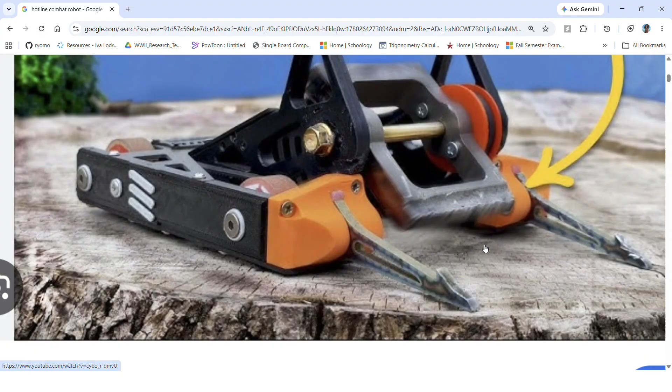And so I can imagine that with this, he probably has either an aluminum or some sort of strong 3D printing filament, maybe PETG. And you can see here, he doesn't use a direct drive to his weapon, right? So he probably has some sort of brushless motor down here attached to this belt on this pulley that's spinning this. It says up to 36,000 RPM, which is pretty fast.

This is kind of going to be my inspiration. I'm going to try not to look exactly at how he's doing this, although I can kind of see right here. Actually, I might as well learn from him, see how he's doing things, and maybe understand, because he seems pretty successful with what he's doing.

Okay, so here he's using two drive motors, sort of a belt drive system with these two pulleys, or these two belts right here. This is attached to the opposite through an axle right there. Cool. Okay, yeah, I think we could definitely do something like that. And this does look like some sort of 3D printed material.

I kind of want to go with sheet metal or sheet aluminum, and I'll probably just outsource that to SendCutSend, although I do kind of like the carbon fiber plates down here. I think it's really just going to come down to how much weight we want to use.

I've seen a lot of people using TPU as a material, and so I do kind of want to use that as a sort of outer shield to absorb some of those bigger hits. Here you can see this vertical spinner is using TPU where you would expect the weapons to make contact, and I think that's a really good idea. So depending on the weight limit, I do want to eventually incorporate a TPU outer shell. But for the most part, this is going to establish our design.

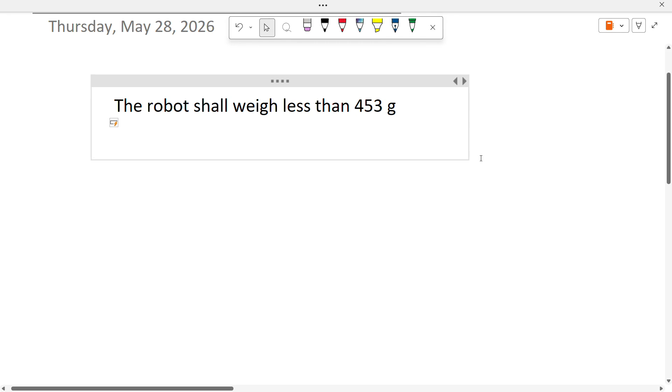And so I do want to write a couple of requirements just based off of this, really simple stuff. I don't think I'm going to go do any research and figure out actual numbers, but just to give myself a little bit of guidance to have somewhat of a proper engineering process. So the robot shall weigh less than 453 grams. I know that's technically a mass, but we're not going to get specific. So the robot shall have a vertical spinner.

The robot, maybe a little bit for the power budget, shall have a battery life capable of, let's say, 2 full matches. And if we find out that whatever LiPo or battery we're using can only supply 1, then we may be able to change that requirement. But we'll get to that when we get to it. If anything, we can just make it really easy to access so we can change the batteries.

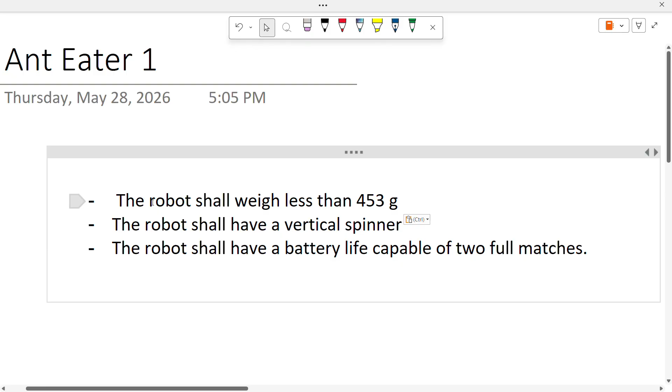So yeah, and we'll say the robot shall have an outer protective layer of TPU with a minimum thickness of... It's hard to tell with the weight limit because I feel like TPU is probably a bit of a denser material, so I don't want to give too much to it as far as weight. But we'll say a minimum thickness of 5 millimeters for now, and these are subject to change. So obviously not doing a ton of proper requirement writing right now, but I do just want to have this to get in the habit of establishing requirements.

So let's go start looking for components. The first thing that I want to do is select the motors. I think our drive motors and our weapon driving motor are going to be our 3 most important components, as that's what's going to help us move our opponent, but also inflict damage. So, look up Antweight combat robot drive motors.

So I do want to end up using a hub motor for the weapon. Oh, this is nice. So they sell weapons as well. That actually could be pretty useful. I kind of like this one. I'm assuming that's inches, 3.25 inches in diameter. That could be pretty helpful. If they don't have the exact size we need, I'm sure we can get something cut out of steel or maybe titanium, depending on how much that costs on SendCutSend. But I just want to look through here and see what our options are. Okay, good to know they have a titanium wedge. That might be good later on.

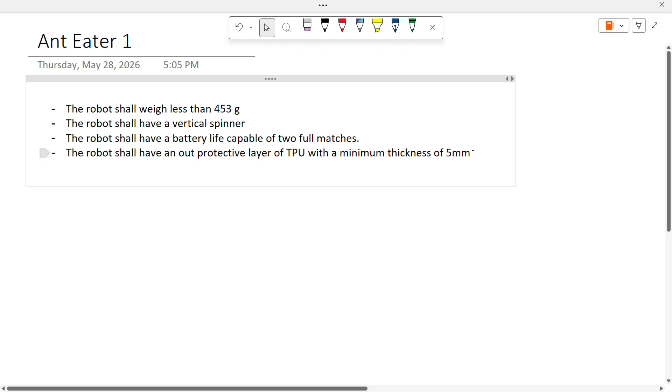Most of my work that I've done in robotics, that is probably the most important information when it comes to motors, or at least when you're trying to integrate motors with your electronics and your mechanical design. Oh, great. So they actually attach a CAD model. So I'm going to go ahead and copy that. Just paste that in there.

Cool. And I think that using OneNote or anything like that is a great way to kind of organize your thoughts. I'm also a big fan of sketching out what you're doing as you're going, so that you're not limited to your knowledge of the CAD software that you're using. I won't be doing that today, and I will be using Fusion, which I feel like I'm pretty good at, so I don't think that I'm limited by that in any sort of way.

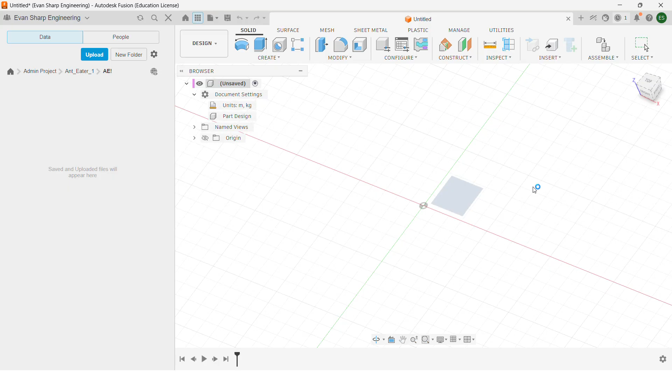But yeah, so we have those motors selected. I'm going to go ahead and download. Now, I'll download that CAD model later. But what I'm going to do is make a top-down drawing of how we're going to arrange all these components within Fusion. So I sort of have all my hotkeys laid out already. And the first thing I'm going to do is create a sketch of this from a top down.

So it's millimeters. Looks like 36.1 by, what is that, 15.5. So we'll go 36.1, oh, I'm sorry. And then our shaft length, we'll go with, is there a price difference here? No. We'll go with the 3 millimeter. This is the same. Yeah, just to save a little bit of weight, we'll go with the 3 millimeter shaft. Or what did I select earlier? No, we'll go with the 4 millimeter, whatever.

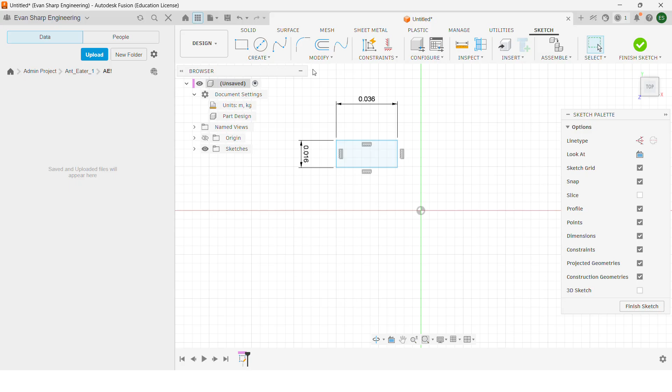So I'm going to then use a midline to get to the center of this rectangle that we already drew. So I've been using Fusion for a really long time, and it's gotten to the point where I don't even know if the way that I'm using it is correct anymore. But I know that pretty much anything that I can think up, I know how to get there. So you can see the way I'm making the shaft is probably not correct, but I just want to make sure that I'm centered correctly on that midline, and this is the way that my brain just wants to do it.

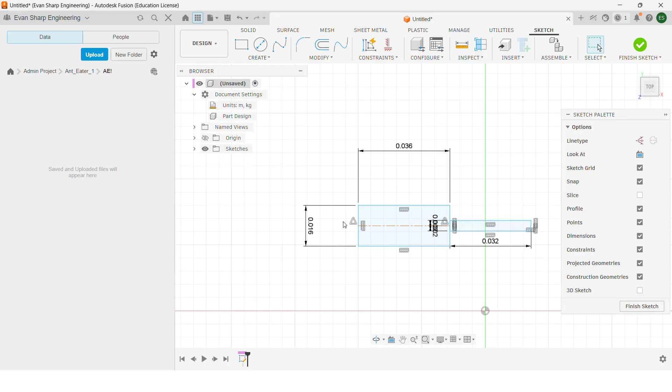So yeah, and then I'll go ahead and trim that line right there. Sure. And let's see, do I want to dimension all of this? Not really. It's probably bad practice, but whatever. Okay. All right, so it's starting to come together. We have our motor here. I do want to draw a midline that we can reflect this across. Let's see, so we're going to have wires coming through there. I want it to be symmetrical about the middle, just for weight distribution.

So just do a construction line parallel with this center line. I think I'm going to go with 2 centimeters in clearance there. 2 centimeters. Oh, but I want to mirror it, so we're going to go 1 centimeter. Draw another center line. And this is what we'll mirror our sketch across. So create, mirror, mirror line, bang.

Sweet. Okay. So now we have our motors laid out here, and I do want to just measure this in a pretty rudimentary way. So we're looking at about 16 centimeters. That's kind of what I figured. I figured we would end up having kind of a square design, maybe 15 by 15 or 16 by 16. It looks like with all of our frame and stuff, it might end up being 17 or 18, but that's fine. For now, I'm not gonna get too caught up with that. Okay.

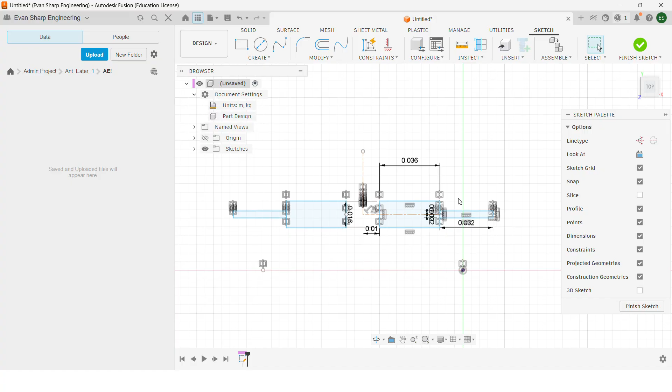So the next thing I want to do is, we really should do our battery now. I say that, I think I'm going to end up just doing like an electrical bay, if you will, over here, and probably create some sort of custom battery arrangement to fit that, rather than buying something pre-bought. That way I can have a little bit more creativity with how I'm doing this. I am being a little bit lazy right now. I probably should establish some sort of power budget, but I'm not.

But, considering a million people have probably made Antweight combat robots before, and they probably use 2 of these motors and 1 hub motor, and they all use the same receivers and controllers, I'm not going to worry about that right now. I'm going to assume somebody's done it already. I will also be able to figure it out down the road.

But for now, we kind of understand our width, and I want to go with a square design, just so it's a little bit more stable and easier to control. So we'll go with the center rectangle, and I'm going to make this a construction line, because I'm not married to this design yet, but let's see. So that's 16 right there. We'll go 17. Give a little bit of leeway, because I'm not 100% sure.

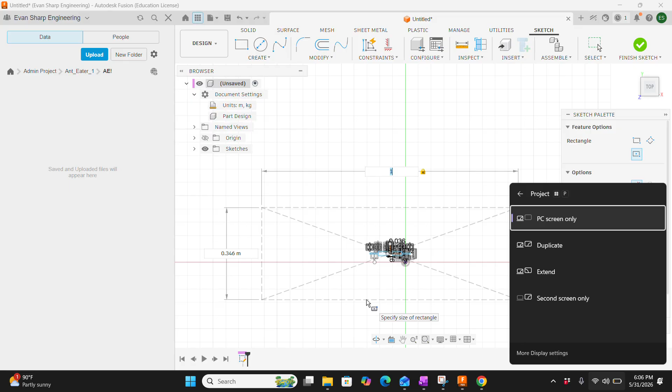Oh, actually, with that, what is that? Sorry, I don't remember what project that was from. But with that 5mm TPU shell, let's go 17.5. Oh, cancel. Control Z. Sorry about that.

First time doing this. This will not be polished, but I do just want to get in the habit of making videos like this, because I really do love projects like this. I think that this is, sorry, I said 17.5mm or centimeters. Sorry, I'm all over the place. Golly. Sorry, trying to think about what I want to say to you guys next and trying to make these sketches at the same time.

I do think that doing projects like this is becoming ever more important, with the advancement of AI and how addicted everybody, especially my generation, I'm 22, is to social media. I think it's so easy to become a consumer of information and media rather than a creator. Even in your own projects, at least I find that the pressure to use AI in order to do what I want to do in a quicker way, so that I can achieve more, consume more information that AI is giving me, is very high, and it's really hard not to, honestly, especially as an undergraduate and as a student athlete.

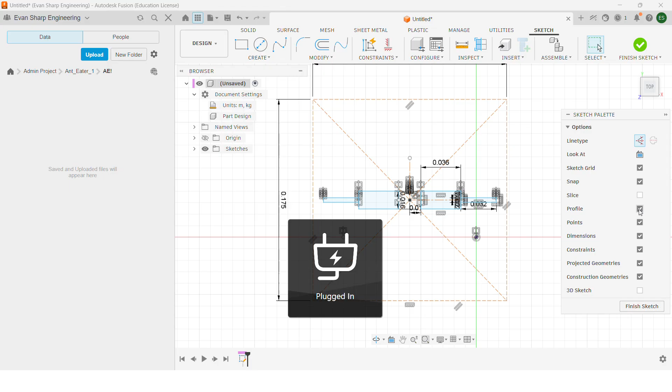But I also think that it's so powerful that if you give it the ability, it will rot away your ability to create things, right? It'll rot away your ability to make critical decisions. Just the same way that social media will rot away your attention span, I think AI will rot away your creativity and your self-reliability, right? So that's kind of my spiel on that.

Okay, so back to it. We have our motors now, and I'm going to go ahead and start sketching out the frame. I mentioned earlier I wanted to use sheet aluminum. This is going to be really light. Not 100% sure what gauge I want to use yet, though. I know I am going to outsource this to SendCutSend because I don't have a way to cut aluminum. So I'm just going to look up SendCutSend aluminum. We'll go 6061 for now.

So I'm going to gauge thicknesses. I have no idea how thick I want to go. No idea at all. But I do know that I want it to be definitely not close to 2 centimeters, probably a little bit less than 3/4 centimeters. I'm not 100% sure how to justify that though. Let's see. You're gonna see my engineering inexperience because I am a recent grad, so I have a lot to learn.

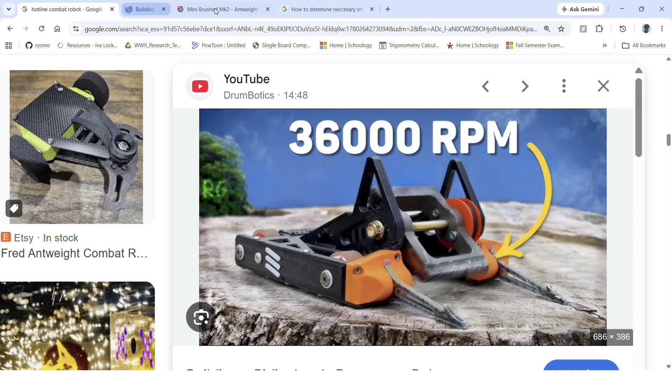And so I really do think that if I have 1/2 centimeter, maybe 3/4 centimeter aluminum, acting as this frame right here, it's going to be more than strong enough to take that impact, especially in the Antweight class, which is why I'm not too worried about what I pick here. So let's go ahead and look.

Yeah, I know I just had that whole spiel about AI, and then I'm using the Google AI summary.

So let's go to sheet metal gauge size chart. Okay, so aluminum, inches, millimeters. We'll go in millimeters. For some reason, my brain just works better in the metric system, even though I am American. I do want to go 6061. Closest to 7 millimeters at 6061. 2 millimeters. Okay, maybe 7 is overkill. 7 millimeters is definitely overkill. I don't know what I'm thinking.

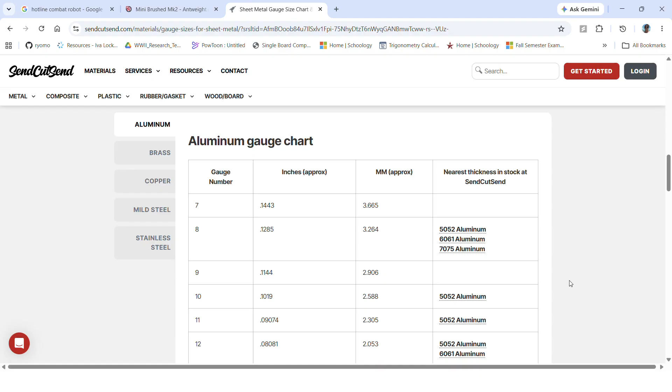We'll go with this. This looks like it's 1/8 inch. Sure. So that's what we're going to go with. And also they have different alloys there. That one has the most options. So if we want to go back and change, because this might have a slightly lower density and might give us some sort of attribute that we want later on, we still have that ability. But for now I'm just going to go ahead and put that in the OneNote.

All right, we're getting somewhere now. So now I understand the thickness of that, and so we're going to use that for our rails here. So let's see, what was that? 1/8 inch. I'll be able to remember that. So I'm going to go ahead. You're about to see the sort of roundabout way that I like to make sketches. So even though this is 1/8, I'm going to go 1/4 because I'm using a center point rectangle, right? But it's right on the face of that motor, right?

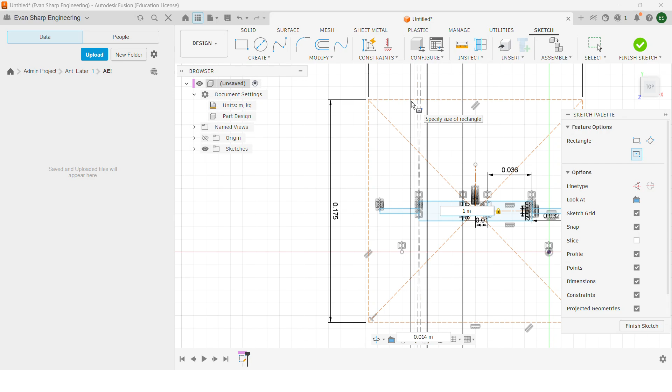So I don't know if I want to go all the way. Well, we want our wheels to be in a square form, so yeah, I will go all the way there. Let's see, 1/4 inch. Oh, this is length. I'm being an idiot. All right, so it's going to automatically constrain to that 17.5 centimeters that we set out earlier. So I'll go to the other dimension, and I'll do 0.24 inches. Right, okay.

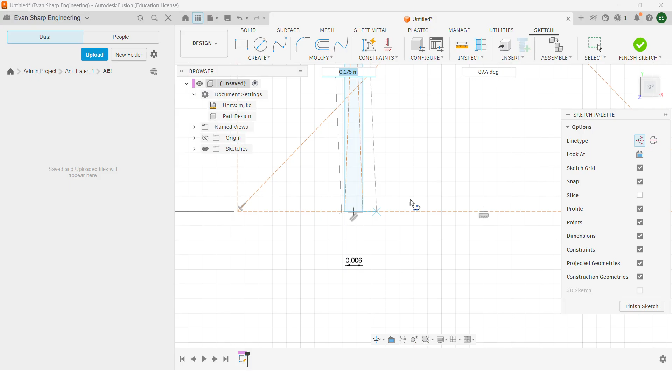And then what I'm going to do is I'm going to draw a center line here. Sorry, I'm on the wrong type. Wait, what is this? Construction. I need a center line. Right, and then I'll do a real line, kind of overlapping that. And then what I can do is use my trim tool, sort of trim that fat. Oh, I picked the wrong one. I didn't want to. T. Okay, fine. Yes, thank you.

Am I using sketch the proper way, or the way that they intended? Definitely not. But that is okay. Okay, so now we have sort of that sheet metal cutout that we're going to do from our top-down view, right? And so the first thing I want to do is, if we go back and look at Hotline, you see these frames, right? It looks like he 3D printed those. We're using aluminum, but that's what I'm creating right now.

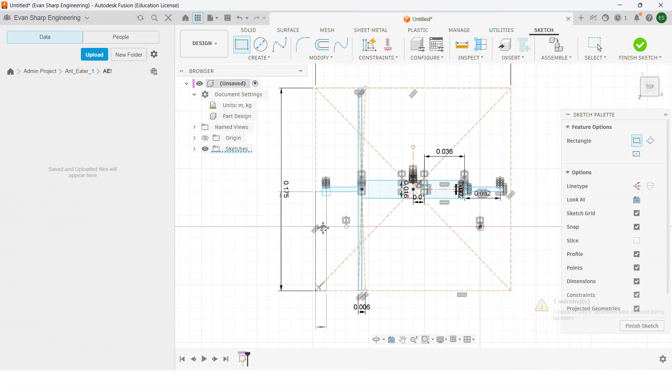Tab, I'll go point, what was it? Oh, right, 1/8 inch. Perfect. All right. Guys, this is coming together. And I saw these as we were looking through earlier. Oh, no. I just closed out my OneNote. But

as I was looking through the Repeat Robotics library or catalog earlier, I saw these. Gold clamp hub for custom wheels. Okay, that's not what I thought it was going to be. Gold screw hub for custom wheels. No. What I'm looking for is some sort of hub in order to attach these aluminum frames together. And so here we go. Something like this. Yeah, this is actually perfect.

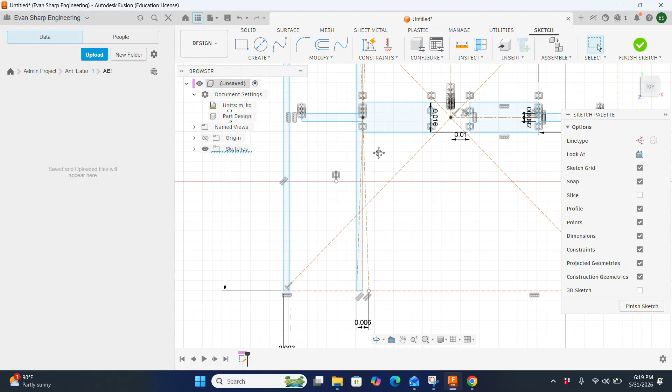25 millimeters. Yeah, this is perfect. So this is exactly what I want to use in order to attach my aluminum frames together. So I'm going to go ahead and CAD that up. And so that'll go in these corners, right? Now I'll do that later. We're rolling right now, but I am going to use that thickness.

Okay, so we have that 2.5 centimeters, right? I'm going to go ahead and finish this sketch. And right now I'm just going to extrude where that frame is, right? We understand that that motor is going to be in the center point. So yeah, we did all those sketches just to have this. But we're going to go 2.5 centimeters. Oh, that's 2.4. Okay. Here we go. We're working now.

And what I'm going to do is I'm going to go download the CAD model for this. Do they have a CAD model? Yes. Awesome. Wonderful. Download file.

Okay, while I was browsing through Repeat Robotics, I also found these aluminum hub motors, and so I am going to go ahead and get one of these, because it looks like you can go direct attachment to the motor, which is something that I want. I don't want to add any unnecessary parts, and I do think we'll get much stronger hits and much stronger collisions if we go direct.

Let's see, do we want red, black, raw? Oh yeah, I definitely need the hardware kit too. Okay, this is definitely coming out to be expensive. We'll go with the black beater. Maybe red. I'll decide that later. But I am going to go ahead and download the CAD model. Is there no CAD model? I would really like a CAD model. Is there a technical drawing?

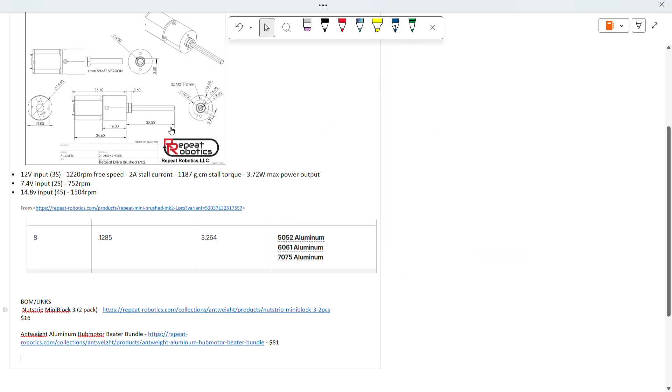Oh, this is for one, so I'm going to have to buy 2 of these for 20 bucks each. They're definitely scamming. They're not scamming. I take that back. They're probably a really good company, and I've heard some good things about them, but they do have a little bit of higher prices. But I think I'm getting a good deal. And I think these are pretty high quality components, so I'm happy to pay for that.

$40. Yeah, so this is climbing quickly. But we'll figure out how to reduce prices later. For now, I just want to go.

Okay, so now I'm just uploading all of the CAD files that I downloaded. So we have our brushed motor, 4mm shaft, our hub beater assembly, and then okay. So now we have those sort of side frames that we made. Pretty bare bones at the moment, but we'll get to that. And I went ahead and got these CAD models so we can start sort of putting together an assembly.

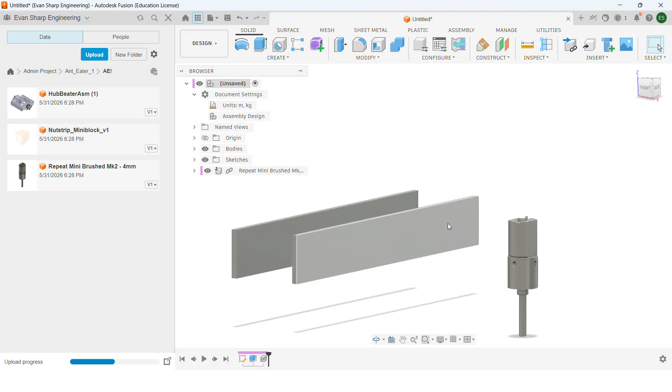We'll convert this. So I don't like the Fusion update that they did a couple months ago, where you have to set a file as being a part, an assembly file or a hybrid file. I'm sure there's valid reasoning for that, but the way that I learned to use Fusion, and as I mentioned earlier when I was doing the sketches, I don't know if I do it correctly, but I've always just made parts and then I turn them to components when they're ready to be components. But that way I'm able to reference components to one another as I'm building my assembly file.

It's never made a lot of sense to me to create a component in one file and then drag it into another file and just keep referring back to the dimensions, or I don't even know how you would do that and make the parts align, right? So it makes a lot more sense to me to just always use the hybrid files. Okay, so here we have our motor.

Right now its material is just steel, just so I can differentiate it from these aluminum components. I'm going to go ahead and assign it a material. So modify material. Forgot that I had the shortcut U there. Okay, it probably doesn't matter. Let's see what looks cool. Metal. Actually, I should definitely just do appearance, not material, so I can still reference properties, because I know the weight of that. So we'll go metal, coatings. Oh, this black oxide. I like to do this just so that I can see what different components I have going on.

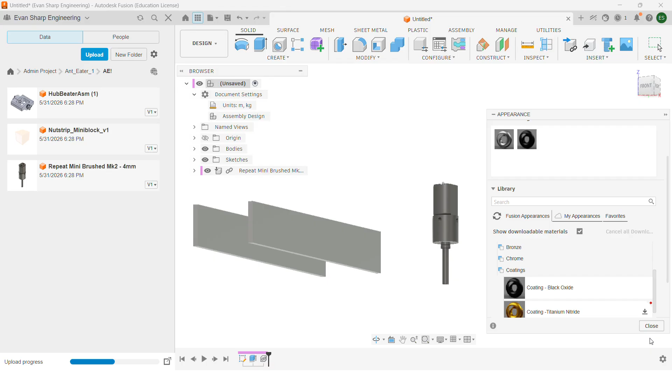There's definitely some more tenured engineers watching this and shaking their head, knowing that I'm just doing a million things wrong. But I'm an entry-level engineer, and so I'm learning.

So yeah, I'm going to go ahead and joint that right there to this aluminum, and we'll go ahead and assign the aluminum there. And I'm seeing that this is 2 separate bodies in one component. I'm fine with that for now, just because part of me wants to just have the same component copied over, but I know that this one's probably going to have different fastening holes than that one, so I'm going to leave them separate for now. So I'm going to turn visibility off on that one and get to work on this one.

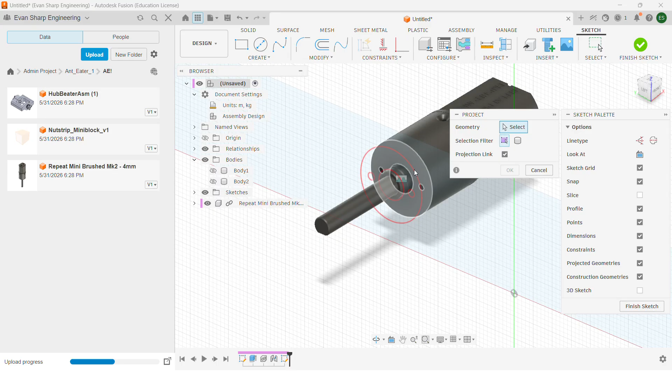So my favorite tool in all of Fusion is this project tool. So I just press P, and I can project this face, and God, that's so easy. And now I have that sketch. I can just go offset, give a little bit of a clearance here. We'll go 0.5 millimeters, perfect. And we'll do 0.25 millimeters. Now, what's really going to constrain us is SendCutSend's sort of manufacturing tolerances. But I gotta imagine they can get it down to 1/4 millimeter for sheet metal.

What's going on here? If my employers are watching this, I would definitely take more due diligence for you guys. But since this is just kind of a hobby thing, being a little bit rough around the edges, I'm sure it'll be okay. And then we'll just extrude this all the way out. Just make sure it's only cutting that one body. Okay. Perfect. Look at that. All right.

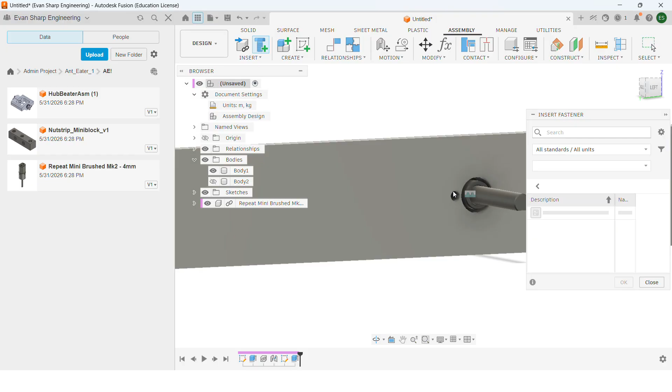And I'll go ahead and do insert fasteners here. Oh, there it was. Insert fasteners here, just so that when I go ahead and make these wheels, I can see how much room I'm going to be working with. I don't think I want to do countersunk. Probably want to do something small, like flanged. Probably doesn't even matter what I select right now, because I'm going to end up doing something different later when I actually look into buying these components. But we'll go flanged. No, I don't like flanged. Definitely use round head. Most likely use a hex socket.

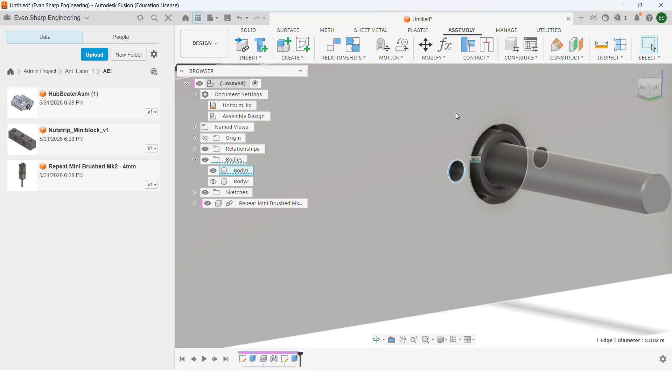Okay. And just put that bad boy. No. That's way too big. Wait, no, what am I talking about? Yeah, it is way too big. Auto M3, can I not go smaller than that? What's the diameter of that hole? Close. Hold on. 2 millimeters, and it's pretty small. I may have to attach these motors. Let's see, are these tapped? I can't tell. It doesn't say. Okay. Alright. Yeah, that'll do for now.

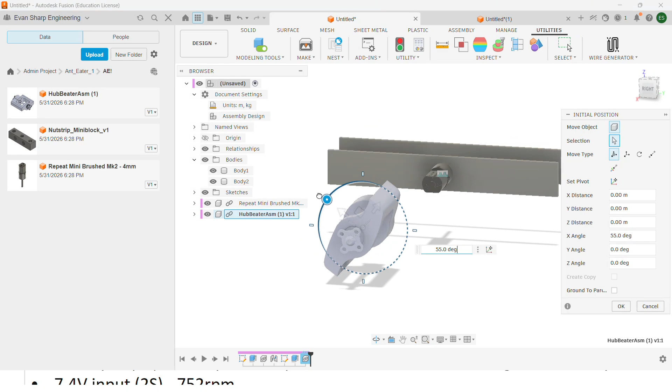So now I'm just placing this weapon, and I want to orient it vertically because I feel like that's going to be the more constrained space. Obviously, I don't want it dragging on the ground. Doesn't really matter where I insert it right now. I'm eventually going to joint it to part of this, but just to visualize this right now, because I want these bolts right here.

Now I want this plate to fasten to this, right? So this isn't going to end up being rectangular. I'm going to end up having sort of like a curve up here, if you can visualize that, that's going to hold this, right? But just for visualizing right now. Okay. I do want this. What am I looking at here? Okay, that's wires.

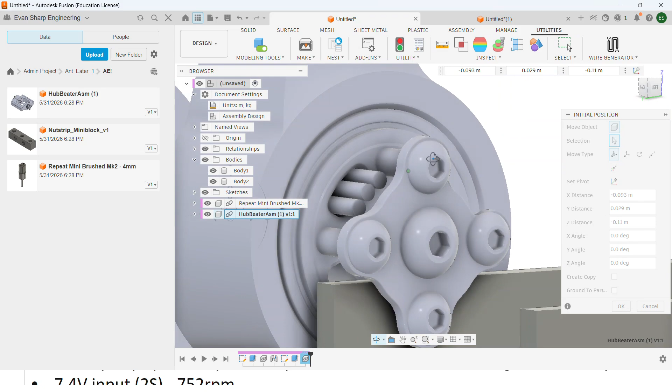Okay. I just wanted to see that. So go ahead, do that. Let's see, this has a diameter, outer diameter of 3.6 centimeters. So what I'm going to go ahead and do, the question is how much overhang do I want to have, right? So if we were to do

So what I'm going to do is I want to constrain this vertically or horizontally with the front of this frame. Right, and then, definitely didn't do that right. I'm going to go dimension, yeah, there you go, 0. Why can I not do 0? Okay, that's going to be fine for now.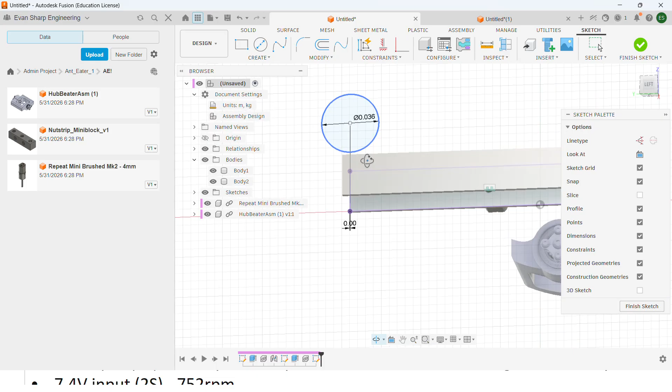And vertically, I'm going to inspect from there, kind of the outer diameter is 6.4 centimeters. Okay. So that means since we don't want this on the ground, but we want to get it as low as possible so that I can get under other opponents, we want that. So half of 6.4 centimeters is going to be 3.2 centimeters. Just to be safe, I want to give it about a half centimeter clearance from the ground. So 3.2 centimeters, 27. Okay.

Now you got to figure our wheel diameter is going to overhang probably by at least 3 millimeters. So right now we're looking at 32 millimeters because that's half of this diameter, minus, you want to have a 5 millimeter clearance from the ground, so 32 minus 5 is 27 millimeters, but your aluminum frame is going to be elevated by 2 millimeters from your wheels, so you add another 2, so that's 29 millimeters. Please correct me if I did that wrong.

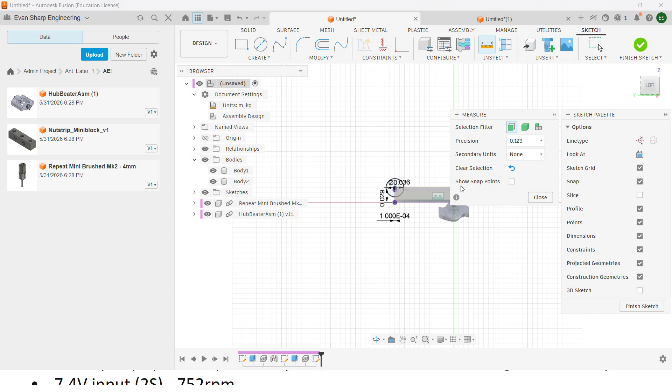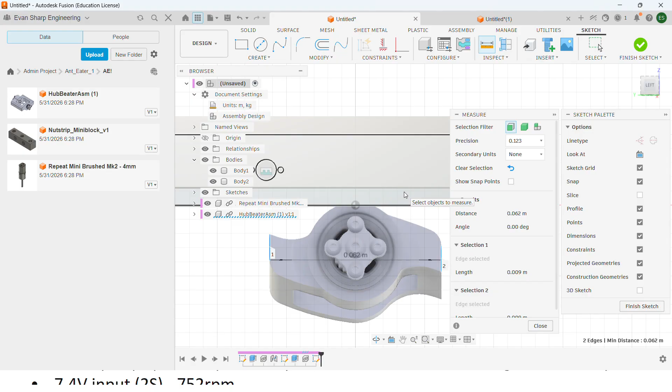That doesn't look right at all. This looks way bigger than that. Did I measure that right? Okay. Right, okay. Outer of 6.2, of 0.062. Divide that by 2 to get your radius. You get 31 millimeters. So 31 millimeters up, it's going to be grazing the floor, theoretically. Add 5 millimeters clearance, so 36 millimeters. Minus 2, 34. Okay. I don't know how I got 29. Sorry, guys. Okay.

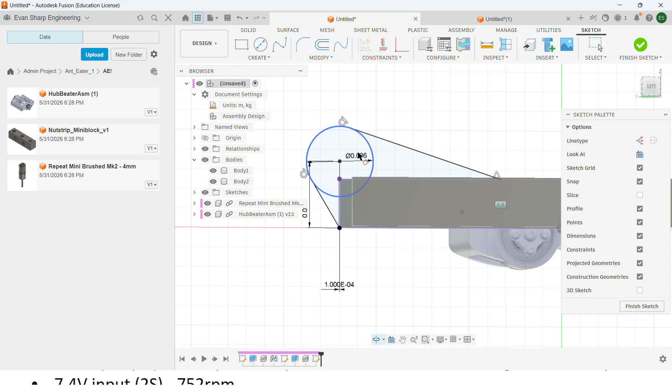So what I'm going to do is I'm going to make some tangent lines. We'll go constraints, tangent, nice. And then just to give this a little bit more shape. Oh, okay. I was doing it from the center point. We'll go to the midpoint there and set it up to be tangent. It's looking pretty good. That'll be on this face right here. As we did a circle. It's awesome.

I just want to see something real quick. I'm trying to understand if it needs to be flat to this face or how this fastening system works. Let's go back to this hub motor kit so I can get a better look. Do they have like an assembled video?

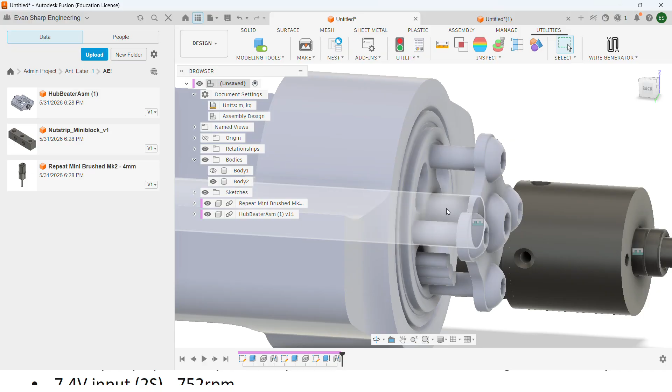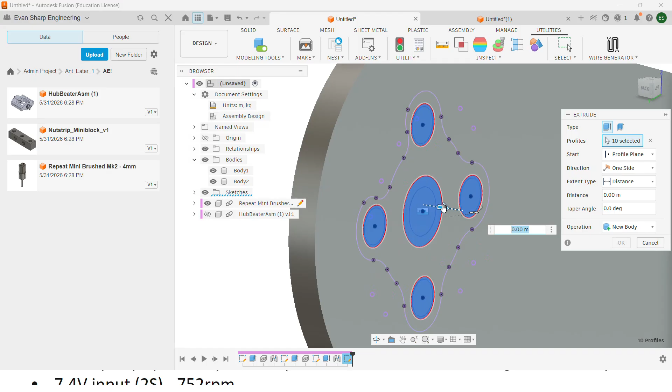So we're going to create another sketch on here. We'll go project. You know, I love the project tool. And I'm just going to hide this real quick. It's an interesting shape. But I'll go ahead and give that millimeter clearance. And give the rest of these 1/4 millimeter. Should be accurate. Turn that back on. Sweet.

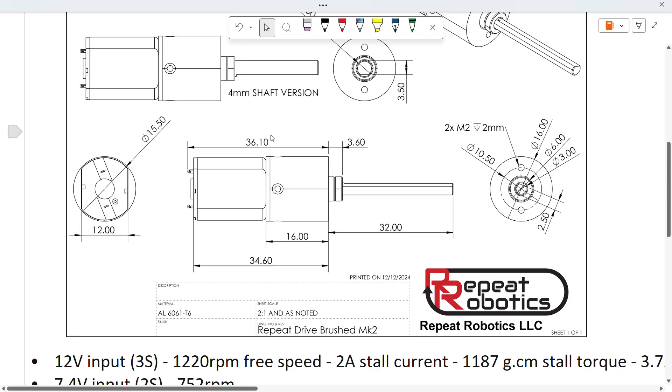Okay, the next thing I'm going to do is bring in these nut strips, and they were like an anodized blue aluminum, I believe. Let me go back. I don't know what material they were. Yeah, 6061 black. Okay, we'll do that. So I'm going to edit the actual part so it's not just in the assembly file. Modify material. Oh, I'll make it blue for now. Oh, wait, oops. Guess I gotta do the appearance as well. We'll make it black. That's what it is in real life. Okay. Back to our assembly file. Update this. Sweet.

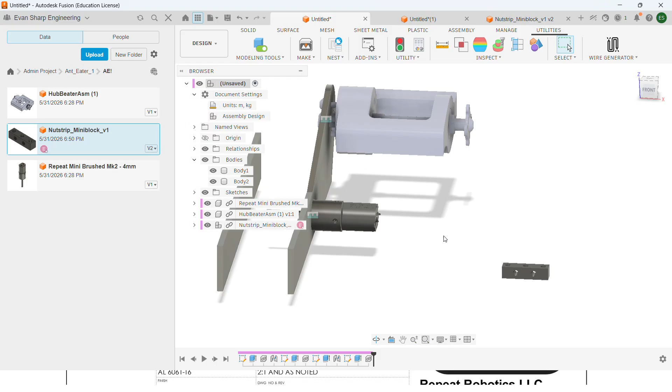I want to have 3 of the holes attaching it here. Flip that. That's 2. So, what do you think about this? Yeah, so I want to hit this corner right here.

If you're still watching this, you're different, that's for sure. Brother, I don't know what I'm doing wrong here.

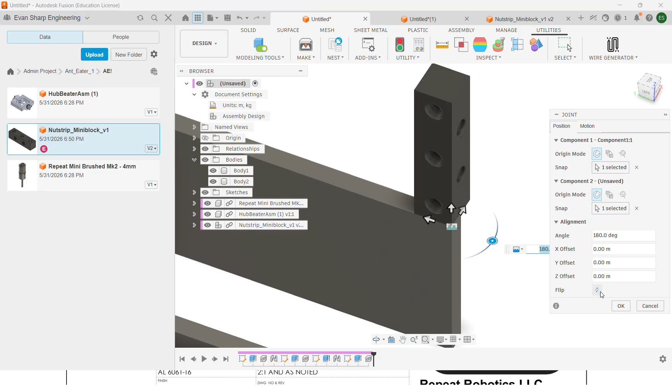There we go. Okay. Now I'm just going to duplicate that a million times. Just kidding.

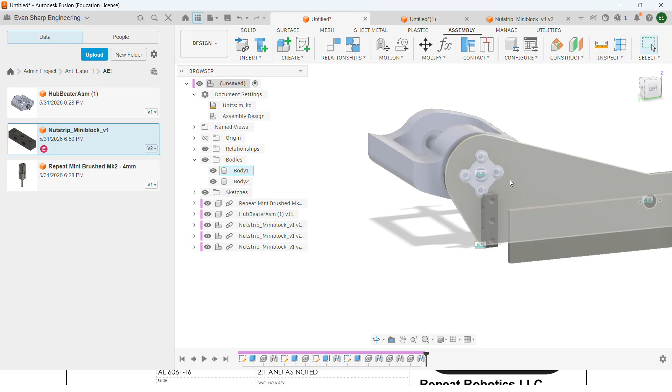Okay, so we're running into our first kind of issue here using these nut strips, right? So it's going to run right into, so you can see, sort of this plate that our weapon is attached to. So I'm wondering if I want to move this up, add a little bit more clearance from the ground, right? Because we're going to end up having ramps at the front of it that will guide any opponent towards our weapon.

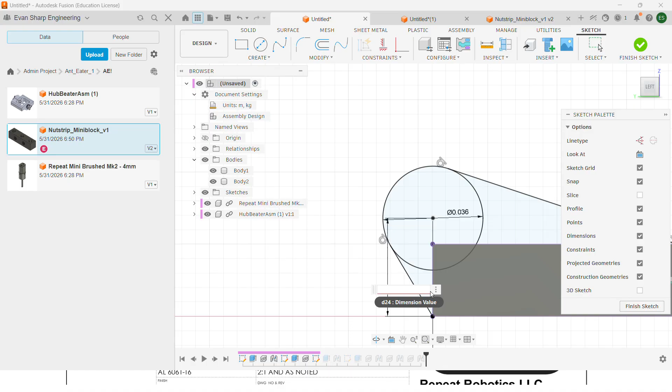So I'm going to go ahead and do that, and I really wonder if I can just edit this sketch and change that vertical constraint, or no, sorry, that's not what I meant. Which sketch was it? Was it this one? Yeah, I think it was. And is this constraint right here? So if we give it another centimeter, that would be 44. So let's see how that affects everything. And it did not like that. But it does look like that would fit.

We're going to go with a little bit of a jank fix, but it should work fine. Yeah, so that's tangent. Bang, bang, bang, entering flow state. P, okay. We'll turn off visibility to that. No, not that. This. Oh. 1mm. And all this is going to be fastened anyway, so as long as there's enough room for the bolts to fit. And I'm going to go ahead and copy that.

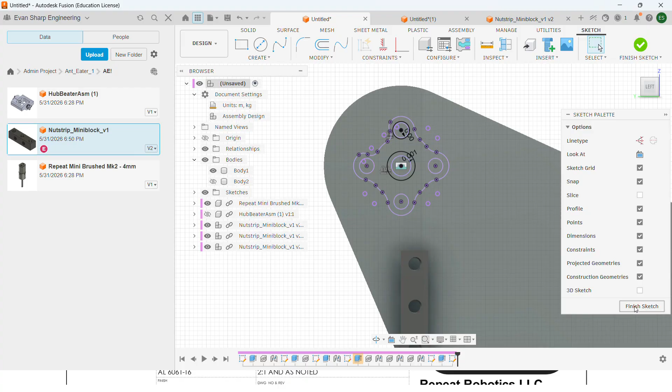Actually, I know an even faster way to do this. I'm going for speed. Go through, and then I want to use the hole tool. Turn that sketch back on for me. Hole. 1, 2, 3, 4. And so we want that, oh gosh, what was this diameter? Jeez, okay, maybe I'm not saving time that way, but 3mm, so we want it to be 3¼. Fast as hell. Not really.

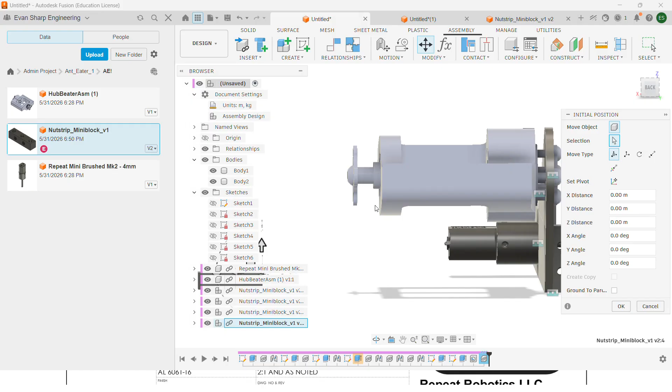Oh boy, it's coming together. Put this last block on. Yep, thank you. Flip. Yeah, this is going a lot longer than I thought it would, to be honest. I thought I would be here in about 30 minutes, but that's just how life goes. Especially engineering stuff without proper preparation.

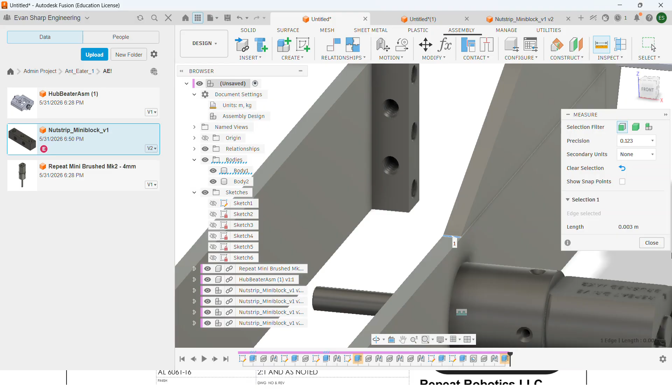And now we're having some sort of extrude issue there. I don't know what's going on. 3mm, and this is supposed to be what? This happens sometimes. Let's change that. Okay. Nope. I mean, sometimes I'm sure I'm doing something wrong, and I've noticed specific issues come up with the way that I do things in Fusion, and I have to find dumb little fixes like that.

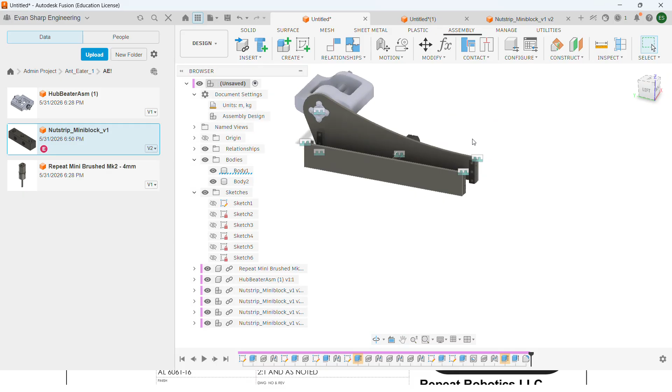So what do I want this radius to be? 4 centimeters maybe? No. Let's drag and see. Yeah, I kind of like that. So 4 centimeters. Yeah, that looks real nice. And for the rest of these corners, well, maybe not, because those are going to be concealed by this back plate that we end up adding. So I think we're good for now.

Okay, so one issue that I am noticing, this is a dumb issue to have. I'm going to have to move that motor. Right, because if we have that other plate mounted here, those motors are definitely going to interfere with each other. So I'm going to move this motor towards the front a little bit so that on the next piece that we create, we can have them stacked next to one another. Shouldn't be a terribly difficult change, but we will see.

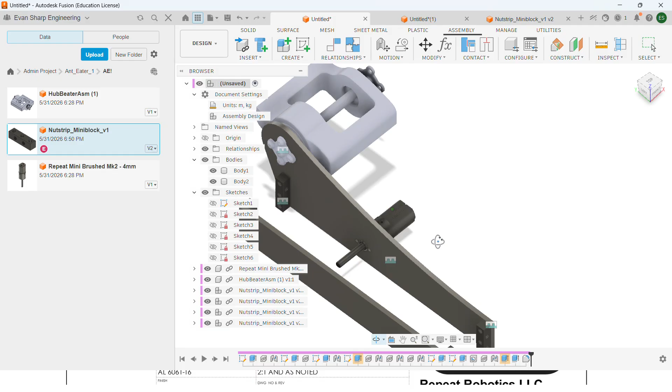So I'm going to scroll my timeline all the way back. I don't remember what is what. Oh, definitely this one. So we're going to edit joint and move it that way. Yeah, 2 centimeters. Bang. Yeah, it's easy, right? And so now, from our midline, when we mirror this over, we'll have to move this 2 millimeters in the opposite direction to balance things out. Maybe not. I don't know how much the balance of those motors is really going to affect things. As long as they're driving the same, it shouldn't be a big deal.

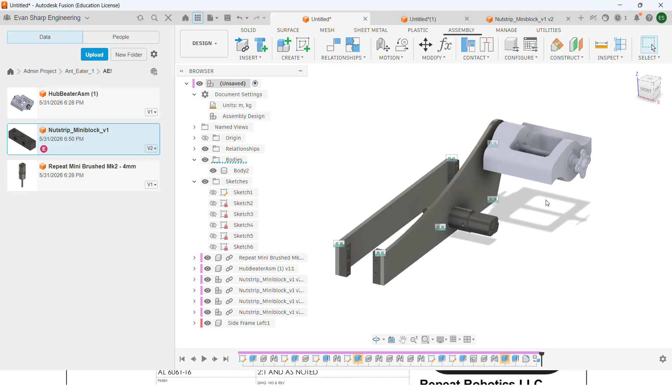Okay, I'm going to go ahead and make this a component. Create components from bodies. We'll call this side frame left. From the perspective of the robot, that is the left side. And we're going to move that over. Nope, hold on. But I want to create a copy. No, that's not how I want to do that actually. I have a better way to do this, so it'll be its own component. Okay. So I'm going to project this whole thing.

Okay. Bang. And then because we moved that, it's 8 millimeters. I want to move this over 4, so it'll go right over. No, it's not going to work, is it? But we know that that's 8 millimeters, so we're just going to create a construction line.

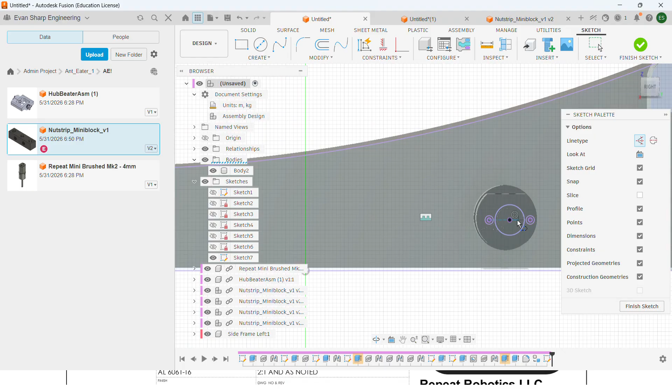Yeah, here. 4 centimeters. Okay, I'll go create a circle. Not a construction line. 8 millimeters. And then I want to know the length from here to here, 5 millimeters. And this is 2. Okay.

L, construction line. Yeah, this is not the right way to do this, to be 100% honest. Because if I were to go and change something about that original one, it would not update this. But, oh well. Yeah, see, I'm already doing something wrong. 8 millimeters. What am I doing wrong here? 5 millimeters. At some weird angle.

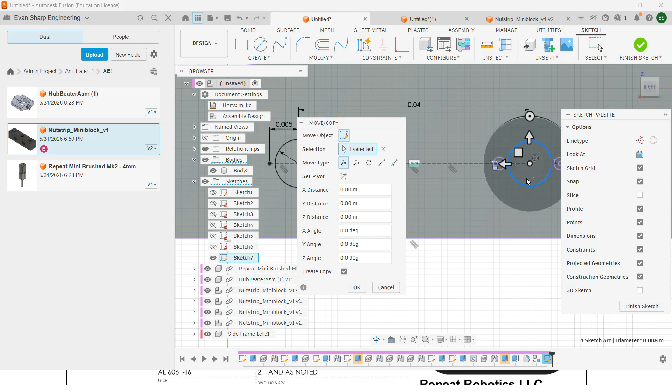Okay, that's how we're gonna do this. So let me. Okay, sorry. I'm rusty, guys. I'm rusty. Almost like that. Create a copy. We're gonna move it 4 centimeters. Nice. All right, and if I remember correctly, we wanted to make that 3.264 millimeters towards the motor.

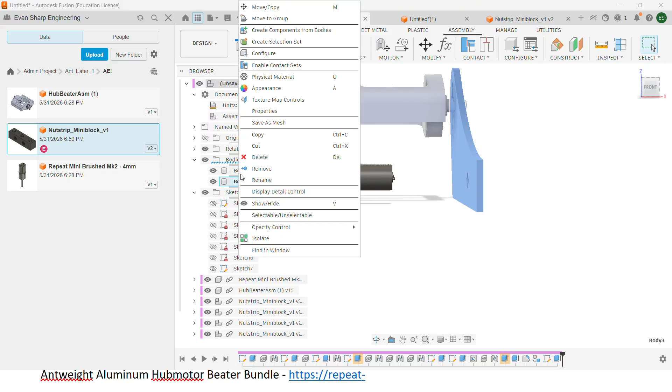Bang, there we go. And then currently that's a body, make it a part. Create components. We'll call this side frame right. Curious as to where we are on our weight budget right now. I'm a little worried. I mean, obviously right now we're not going to be over, but I don't know how we are on track. Looks good to me.

Now, if we compare to this original sketch where we outlined. Okay. So I do think that we can make it a little bit shorter from the back to make it a little more square. Well, it's going to depend on the length of those belts. We'll keep going for now.

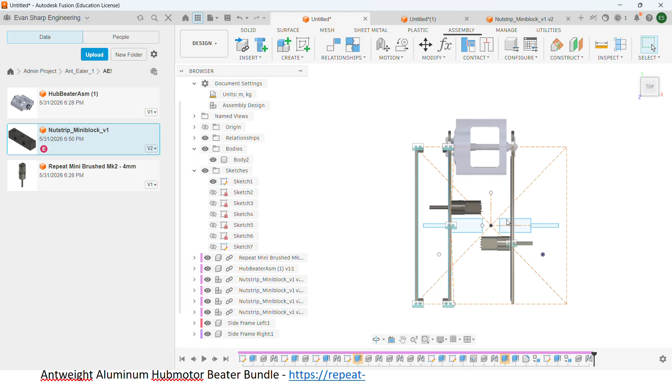Probably should have left that on the entire time. And we could make this a lot skinnier, but because we have this hub motor selected, we'll leave it for now because it's going to be the right width for that. So here we go. We'll create a mid-plane between these two. Okay, make this. Then we're going to mirror this and all this.

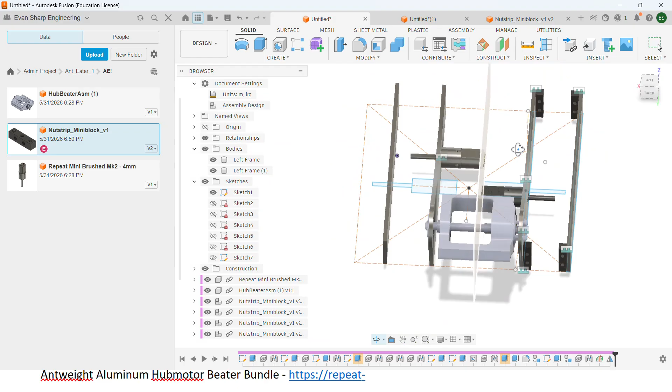And I think that back here we'll have our sort of electronics box, and that will definitely be enough space for what we're doing, and then everything else will be used for our drive system, right? So this is really coming together. I'm going to go ahead and make this front area, right? So let's make the back first.

So what I'm starting to realize is this is becoming more of a CAD kind of walkthrough and not so much an engineering walkthrough, which I'm becoming a little bit regretful about, because I do want the rationale to be there, and I'm mostly just kind of flying by on this and not giving my reasoning for what I'm doing. But you know, this is take number one.

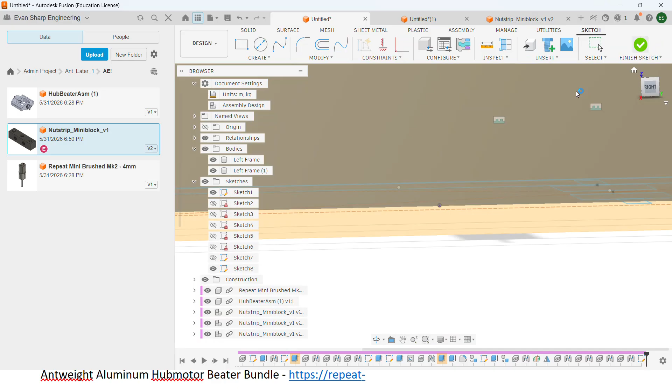So I think what I'm going to end up doing for these front plates is I'm going to have an aluminum plate cut out there, and then a TPU cut out almost like in the shape of a wedge, and we'll have those hooks coming out of the wedge. But for now, let's do this back plate. So create a drawing here, and we're going to project all of these.

We'll give a, why is that not aligned? Oh, probably is aligned, but oh boy. Okay, we're gonna have to make these. So it looks like that. Okay. Let me go reference that drawing and see what that dimension is supposed to be.

So that is supposed to be 6mm diameter. So I want to give it 6.5. But it's kind of hard to center. Right, because 6.5, that don't look right. That do not look right. I don't believe them.

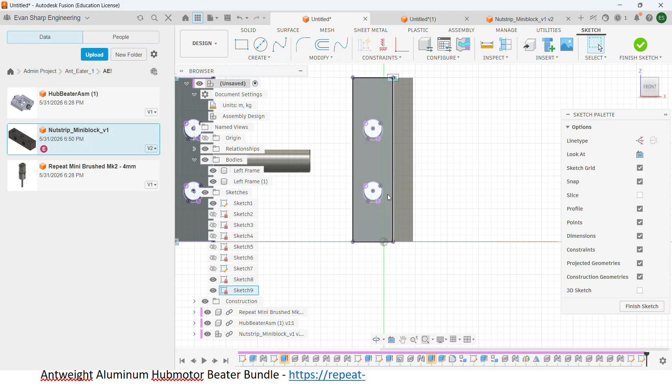Alright, so what I'm going to do is, because I have a drill press, I'm allowed to just make this as is, and if I end up needing to flesh out some of the holes a little bit more, I will do that. Wonderful, wonderful solution, I know. Would this fly in industry? No, 100% no. That's okay. This thing's going to end up getting destroyed anyways. Well, hopefully not too destroyed, but it's going to definitely take some damage.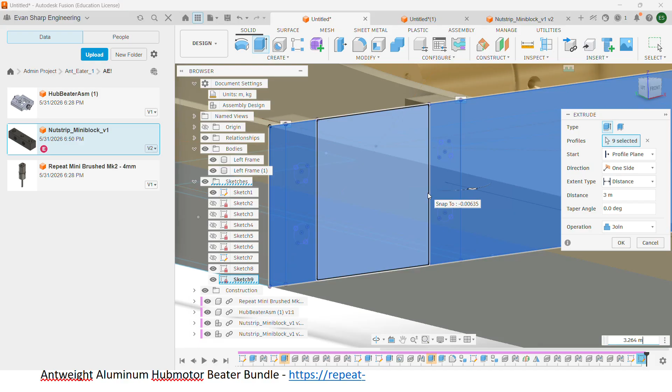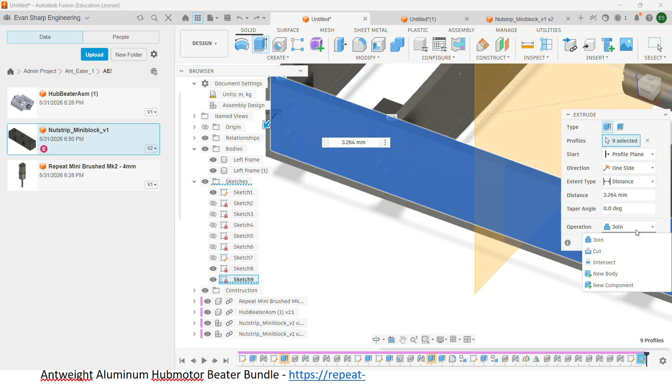Remind me the thickness one more time. 3.264 millimeters. Oops, messed that up. Oh no, attached. I don't want to do that. So the reason it's attached is because I used this join, and I should change it to a new component.

Yeah. So now I'm going to extrude those holes through, and I want to turn visibility off for that, and project that, and that. Okay. So now when I come back, we're just gonna have to do this the old-fashioned way. We're gonna go 6 millimeters. It says 6, but I don't. We'll go 5. 4.5.

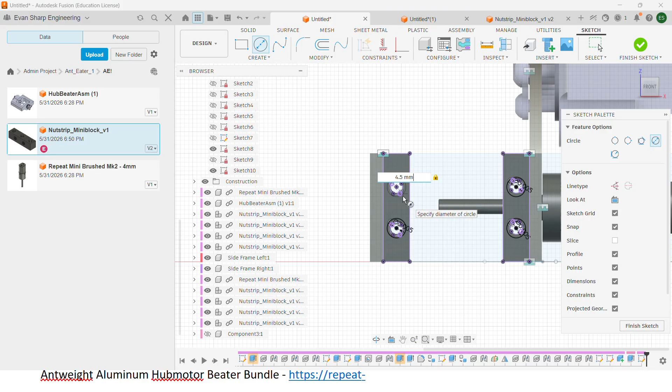Okay, so now we can just select all these holes, extrude them through, and end up adding our backplate. Make sure we're only cutting that one object. Wonderful. There we go. There's our backplate. This is coming together.

Yeah. Okay, I want to go ahead and see where we're at with mass. So I'm going to assign all of these the right materials. So we got to figure out what material I want that to be. If we go back to our options, we have 5052, 6061, 7075. I definitely want to go 7075. And the reason is that's most durable and I believe most abrasion resistant of the options. So just confirm that.

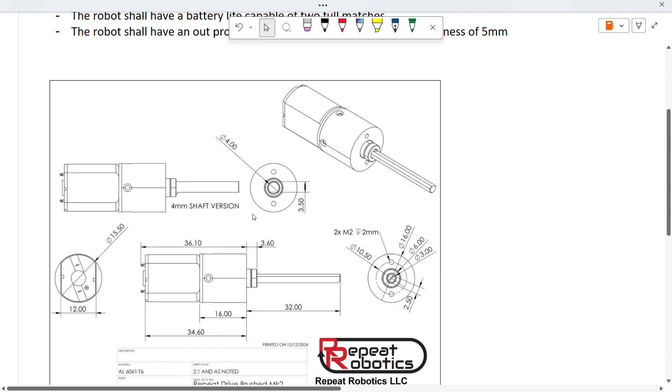Oh, okay. Possesses poor native abrasion resistance, especially in T6 tempers. Has high strength, highly susceptible to wear and scratching. Okay, that's fine, because if you recall, we want to have this TPU layer, right? So ideally, this thing's not going to be getting scratched much, and if it is, it doesn't really matter. But because it's renowned for its high strength compared to 6061 and what was our other option? 5052. That's what we're going to go with. So 7075.

7075. I should definitely know that off the top of my head, but it's been a while since I've selected materials for anything. The last thing I did was my senior design project, and we made most of those decisions just based off of what was available, to be 100% honest, even though we wouldn't tell our professor that, but yeah, it's true. So having the actual options now it's pretty cool.

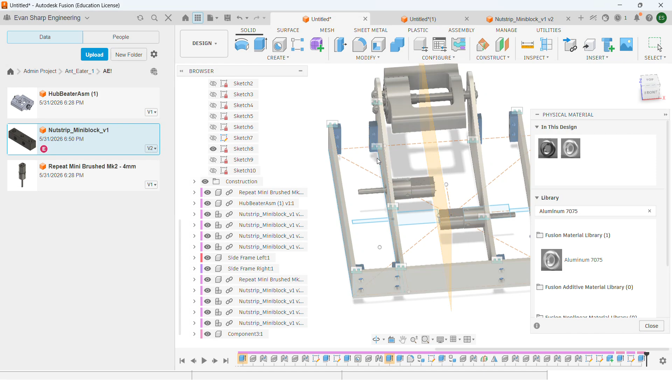I already know the most CAD intensive portion of this entire thing is definitely going to be the drive system, because we're going to have to figure out the length of those belts. That'll determine the positioning of these wheels, because I want to get it as wide as possible to stay within that square that we gave it. But obviously, I don't want to have to make my own belts. Although I could print them from TPU. But I understand that if I buy one, it's probably going to be much stronger.

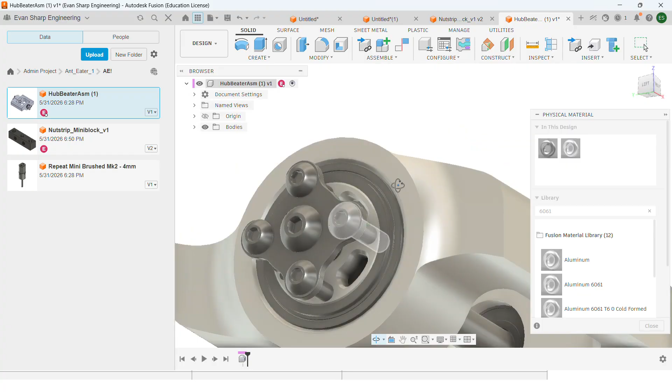Alright, and I believe this was 6061. Modify physical material. Set 75. 60. And those motors were 6061. Oh wait, I need to go to the actual thing. And because I don't know, I want to assume worst case scenario, so I know that most of this is going to be, it said 6061, but it's probably the outer shell. But we'll make this outer ring 6061. Yeah, I don't want to make too many assumptions, so steel's going to be really heavy though. Oh wait, we know the weight of this, so it doesn't really matter too much.

So let's go ahead and do just a sanity check on our mass. So let's go up here. So we know that hub motor, all that's going to be documented. So we have 8 of these, right? And they are 2 grams each, assume worst case. So, wait, 2 times 8, and that hub motor, we'll do everything in grams, by the way. Hub motor is 98 gram, 144. Jeez, it's not light. It'd definitely be easier to do in Excel.

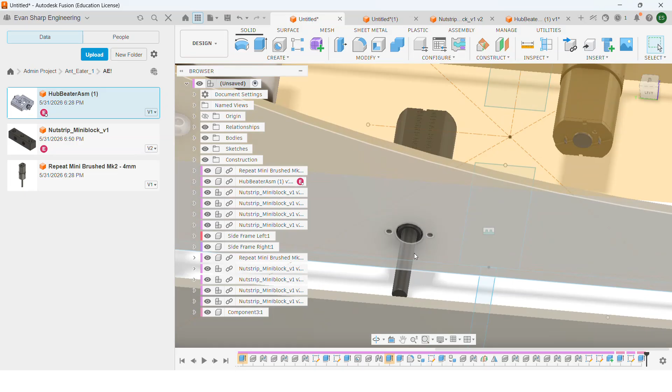And then those motors, I want to say those were 12, but let's double check. We did the 4mm. What millimeter shaft did we do? It's not very helpful. I think we did 3mm. No, it says here. We did 4mm. And 27.5 times 2, 55. Oh, brother. So we're already looking at 160 plus 55 is 215. Okay, so we're pushing on halfway there. That's not including any of all this.

So there's a chance that we're gonna have to shrink this down. And so what I would end up doing to make that process a little quicker is I would remove this fillet, add a plane here, extend it out, cut this, right, extrude these pieces back, move this forward the same amount, and then use the combine tool and kind of link those back together. But I'm going to leave that for now.

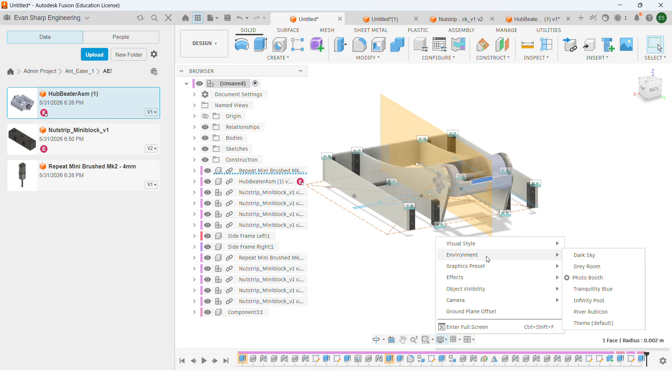Alright, I think that's where we're going to leave it for today. I feel like we're in a pretty good spot, so let's just take a look at it without all the construction stuff. Object visibility, all work features. We have to end up adding our fasteners here. They're going to go that way. Oh, and that's extruded all the way out. Fun. But yeah, no, I feel like we're in a pretty good spot.